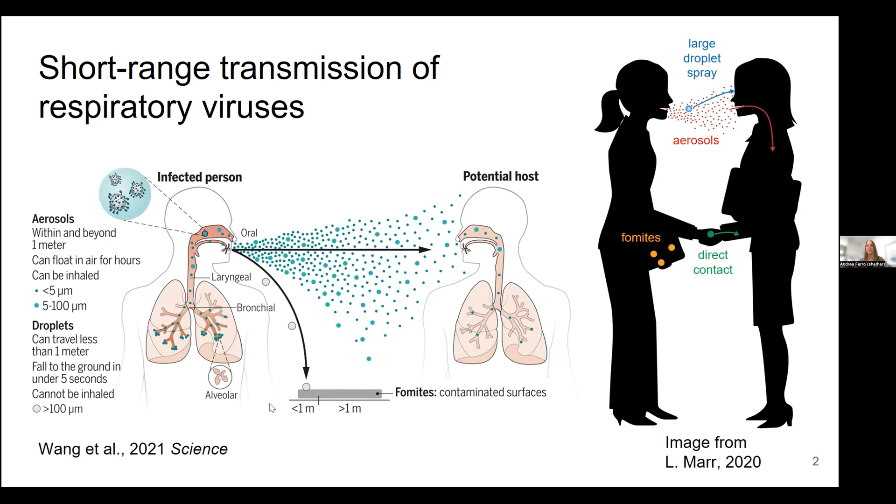Actually, in my lab, we've done quite a bit of work on the emission of the aerosol. So we found that not only is loudness a major factor for the emission rate of the particles that are emitted during these different vocalization exercises, but also frequency. And recently we published a paper to show that children's emissions are about 5 times lower than those for adults. We've also done quite a bit of work on what happens to the aerosol once it is emitted from a person and how it moves throughout the room.

And you've seen some of those images as well in discussions over the symposium over the last day. This shows that the aerosol is sort of well mixed throughout the room. That's often how we model the exposure of another person that's in the room. We often assume that once the aerosol gets out from the person's mouth, then it mixes throughout the

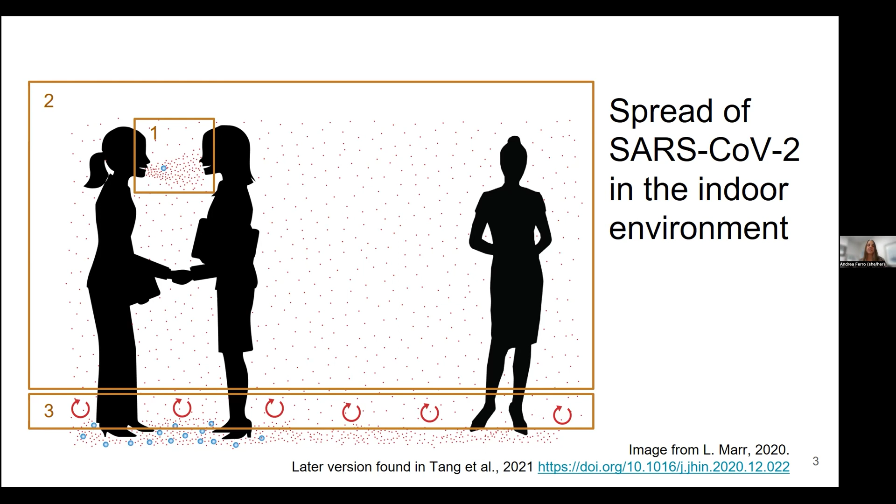room. And then today I'm going to be focused mostly on what happens after those particles deposit onto surfaces and get resuspended up into the air. So this shows the little arrows being fairly small. If a person is walking and moving, and resuspending those particles, they're also helping mix them throughout the room. So we know that the particles that are resuspended from surfaces can get throughout the room, and as Dr. Lee showed, end up in the ventilation system.

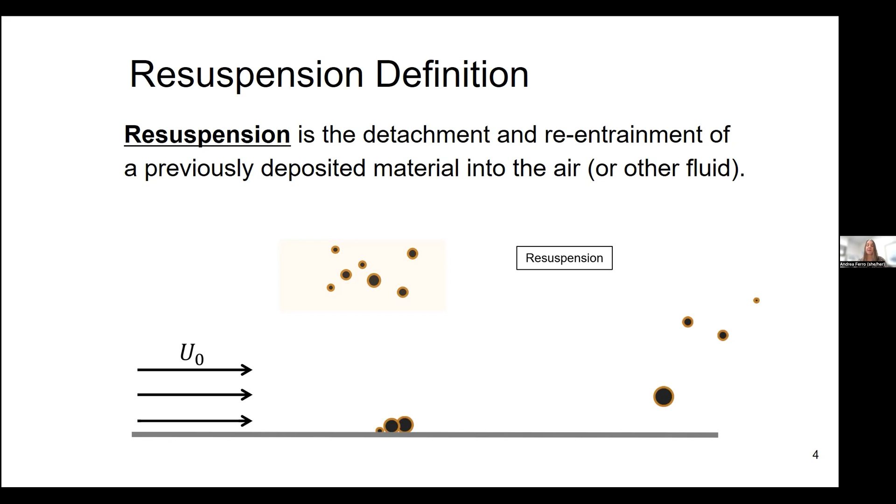So just a definition of resuspension: if we have particles that are in the air, they will deposit eventually on surfaces or be removed from the air with the ventilation. But there could be an external force applied to those particles that removes them. So the particles have adhesive forces that keep them on the surfaces, but an external force, even a foot stepping down, creates enough external force to detach those particles. The larger particles are easier to detach than the smaller ones, just because of the balance of forces. So that's something that we'll see today as well.

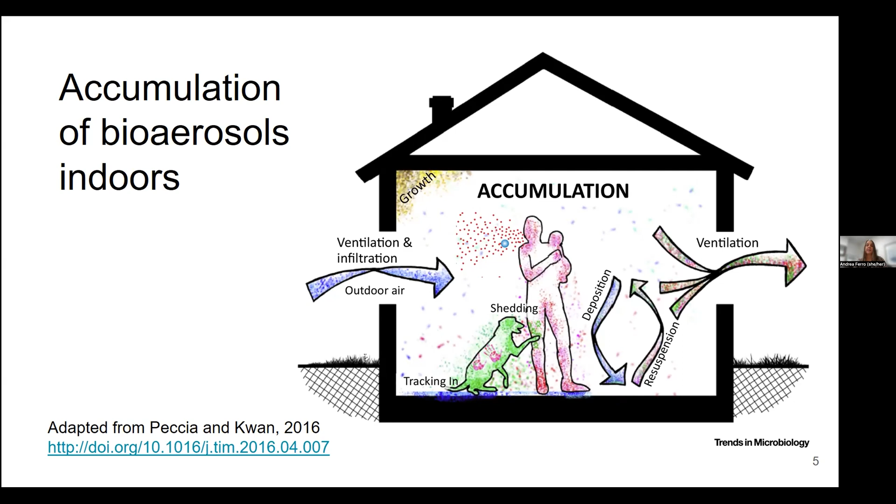Interestingly, the HVAC system can produce that external force. You have some airflow that's produced by ventilation systems, but it's typically not high enough to induce resuspension. This is just a summary of the ways that bioaerosols can accumulate indoors. So the things on the left add to the bioaerosols: natural and mechanical ventilation, infiltration through cracks in the building envelope, and then indoor emissions. So there are all these indoor sources: humans, pets, potentially plumbing, resuspension, and so on.

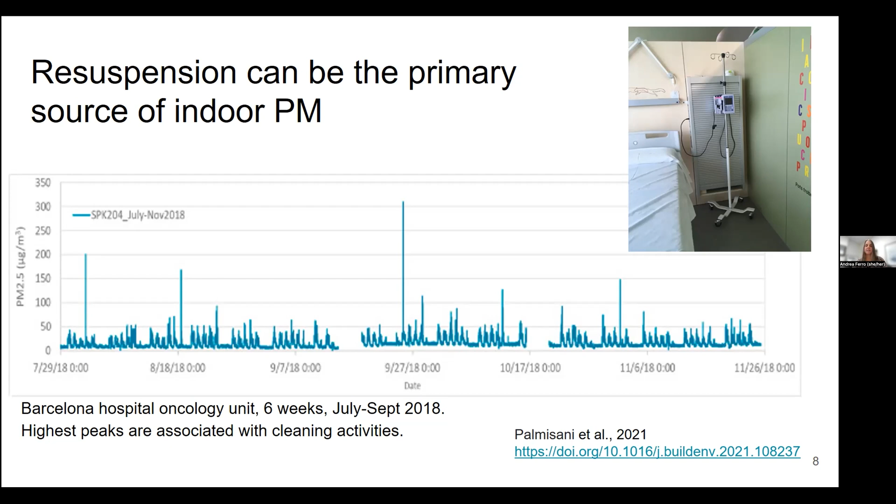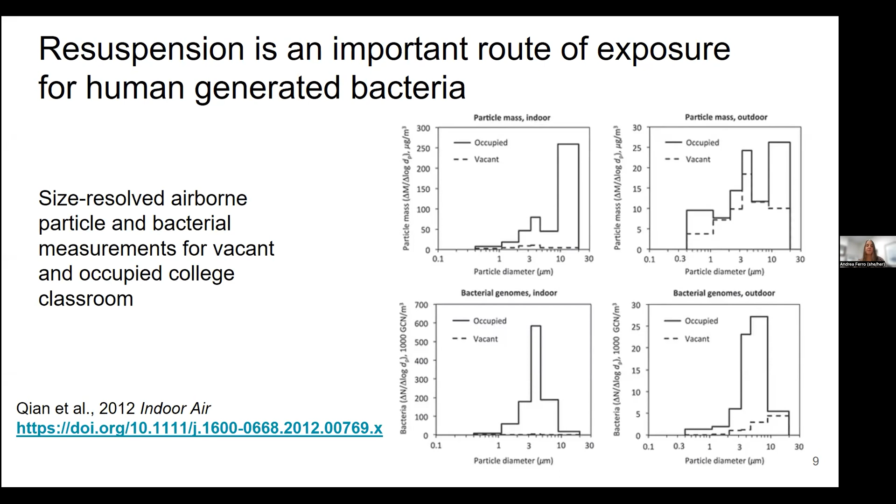But if you look at the bacterial genome, that's also the case. Without people in the room, you have this very low concentration, and when it's occupied, much higher. You can see that the peak here is a little higher, like 3 to 5 micron size. And outdoors, there was actually a little bit more during the occupied time as well. We're really focused on this indoor space, and we know that there were no other sources, that resuspension was the main source of that increase in concentration.

I myself have performed many studies on resuspension, and others have as well. These studies have occurred in homes, schools, hospitals, other types of buildings, but also in laboratories so that we can control the different factors. A major factor is just the way people walk, because of the forces, and the kinds of shoes that they're wearing. Different factors have been tested in various studies: the type of particle, the flooring type, the floor dust loading, the relative humidity, which is also related to the electrostatic charge, shoe type, and individual walking style.

For this symposium, I highlighted these because I think these are things that we can think about in terms of interior design, right? Certainly the flooring type, but also the floor dust loading has to do with how you can clean the flooring and other surfaces. And then the others have to do with how you operate the building.

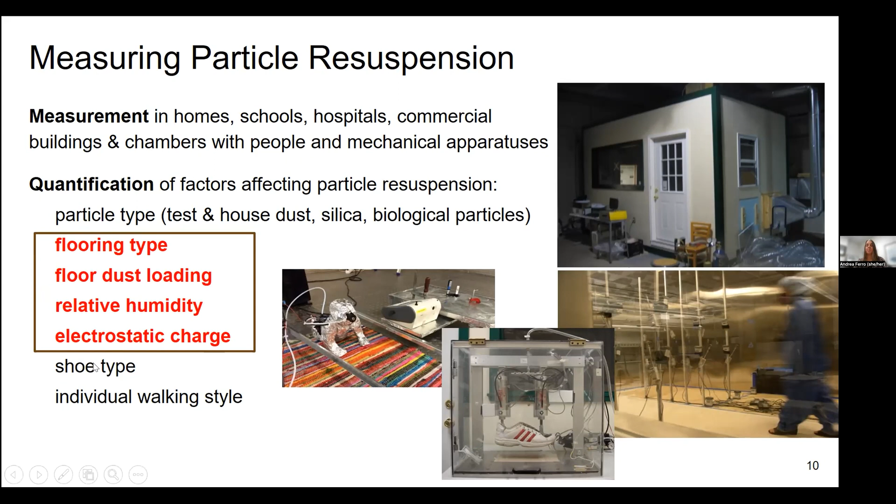I think Shelley Miller talked yesterday about the different sizes of particles. 10 microns and below are what are called inhalable, so they can get into the respiratory system. Different size particles dictate where they end up in your respiratory system when you breathe them. Size is also very important for resuspension, with the larger particles in the size range being easier to resuspend. These data are taken from a mechanical foot that I borrowed from the Lawrence Berkeley National Lab, so we were able to control the other factors and look just at, in this case, flooring.

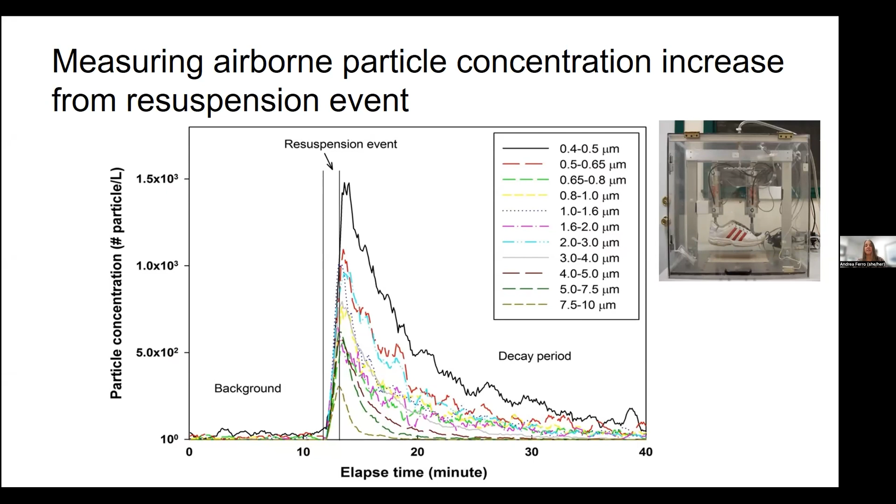Kim Prather was talking about this yesterday, right? The person who's emitting the virus into the air can leave the room, but the concentration in the room is still elevated.

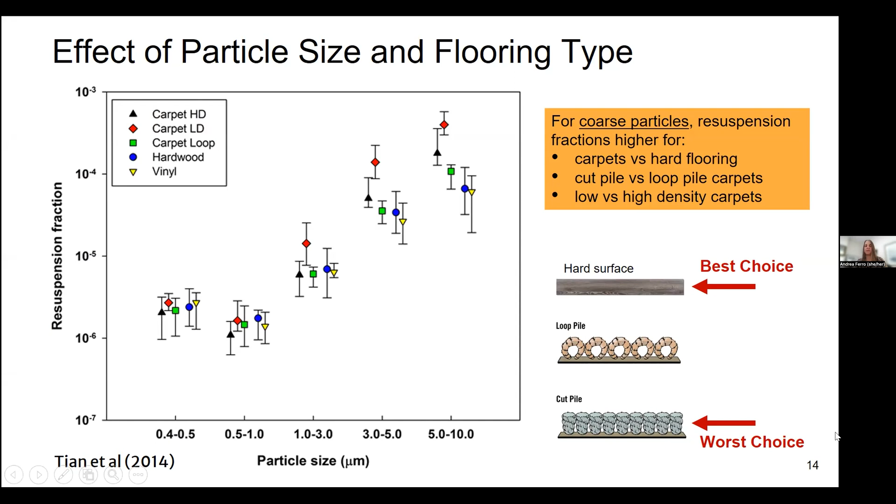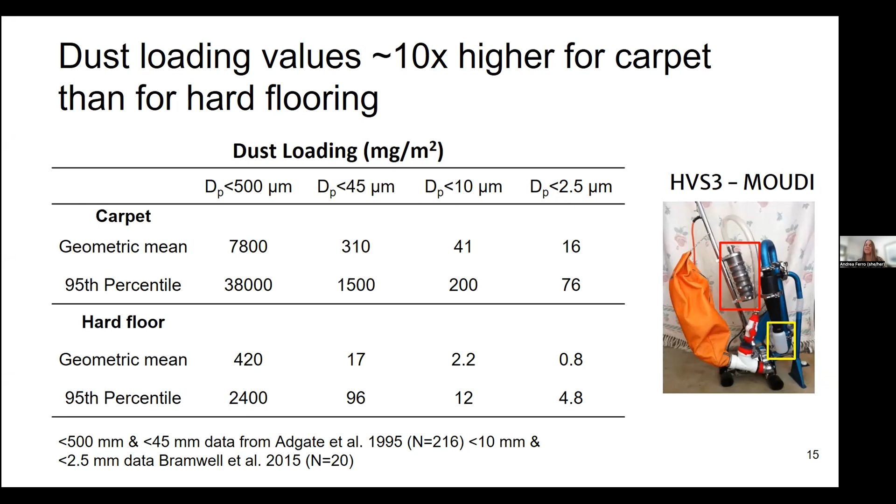So you can see that if you compare carpet with hard floor, the dust loadings are about 10 times higher for carpet. So now you have resuspension fractions that are higher for carpet, as well as the dust loading tends to build up on carpets. So this could be resolved with cleaning, but these are data from the field.

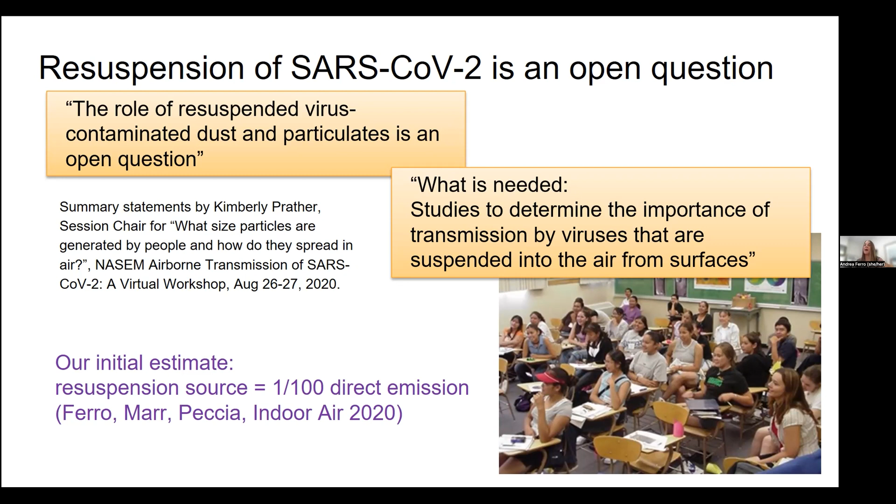And so looking at the size of the particles that are carrying the virus, the respiratory particles, can we estimate what would be this source? And we estimated with many assumptions that the resuspension source is about 1/100th that of direct emission. That is, if a person is emitting the virus in the room for some period of time, and then another person comes in, or that person walks in that room, what would be the emission? And so the calculation that we did, it was about 1/100. Again, there are lots of assumptions in here, and it would matter what the ventilation rate is, the size of the room, all those things.

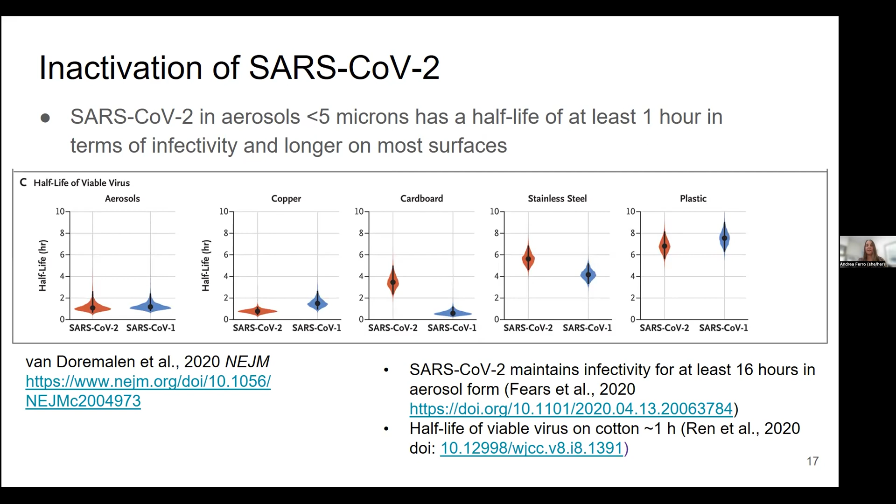Should we worry about resuspension for viruses? Of course, it depends on the infectivity of that virus. These are some estimates on the inactivation of SARS-CoV-2, and we can see that the half-life is at least an hour in aerosols, and also a lot longer on surfaces, up to days. So we do know that we have viable virus on these surfaces.

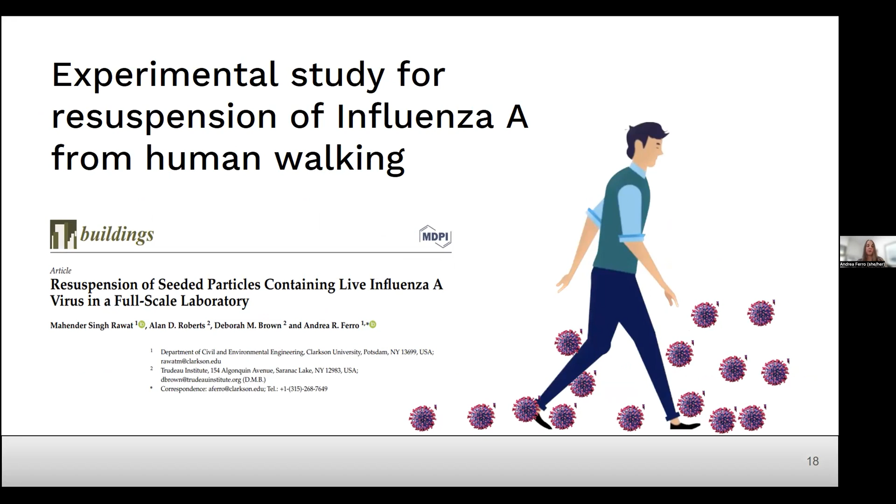We conducted a full-scale experimental study using influenza A as our virus. This is the first full-scale experimental study on virus resuspension, at least to my knowledge, that was just published a few months ago. We did our experiments in a biosafety level 2 laboratory at Trudeau Institute in Saranac Lake. It's an infectious disease institute.

We emitted the influenza virus in a suspension out into the laboratory, and then waited for several hours for it to deposit. And then we had a person come in and walk within the laboratory to resuspend that. We were collecting samples on the surfaces, so there were open plates where we were collecting samples and analyzing those.

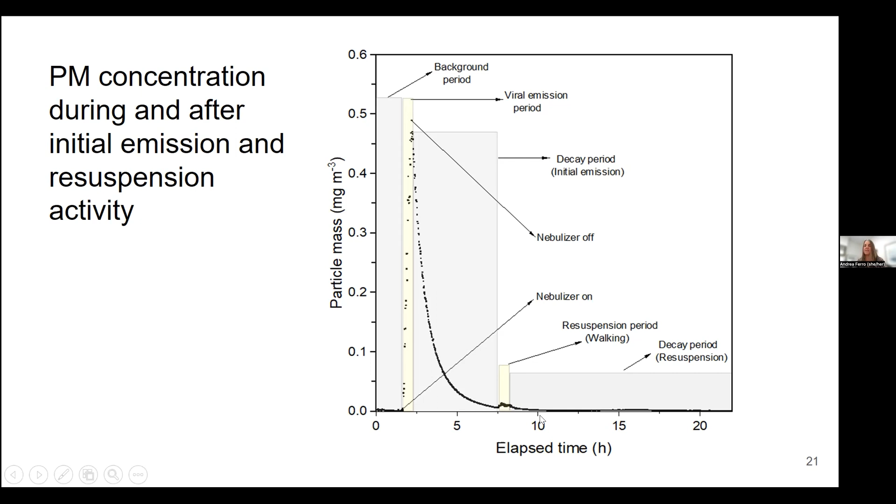Then there's a resuspension event, the walking. You can see the particle concentration goes up again and then decreases. That is the time series for the particulate matter. But if you look at the virus concentration collected in impingers, during the initial emission most of the virus was closer to the nebulizer. These locations are close to the nebulizer, and these are further toward the end of the room, so there were higher concentrations near the source, which is expected.

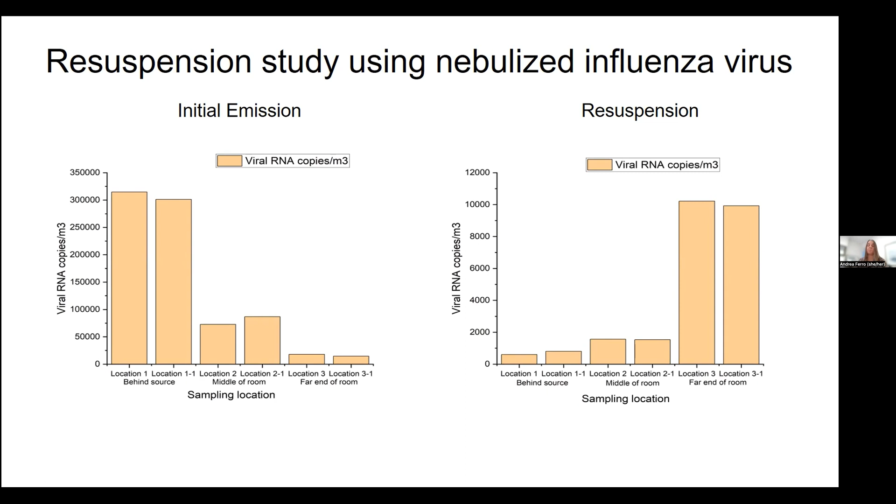But during the resuspension, the opposite was true. Most of the virus that was resuspended was toward the other end of the room. That is because where the nebulizer was, there was a cart and other things in the way. So most of the resuspension activity took place on the far end of the room. So that also makes sense.

As a summary for this study, this is the initial emission for clean surfaces. We cleaned all the surfaces first, and then the resuspension source. This is the viral copies in the air per volume of air, and we can see it's about 100 times less during the resuspension event than the initial emission. We had fairly low air changes, below one air change per hour in this room, so much of the virus that was emitted ended up on surfaces, and that was the source.

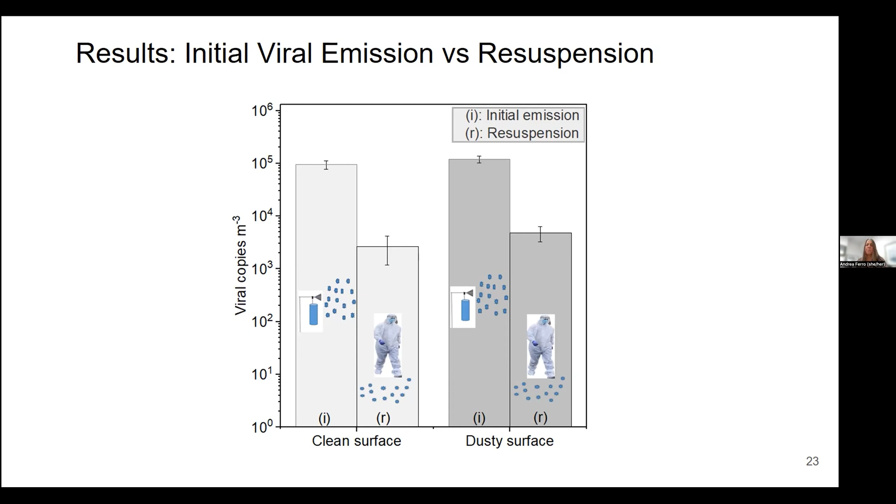We actually looked at dusty surfaces because, as I mentioned, the size of the particle makes a big difference for resuspension. We were thinking that if most surfaces in real environments have dust on them, the dust could act as a carrier for the virus. If the viral liquid particle falls on a dust particle, it might be easier to resuspend. We did see a slight elevation in the resuspension with the dusty surface, very, very small, but there was some.

I also wanted to mention clothing, right? So we talked about clothing and also other surfaces. So this is a study that was just published by Dusan Licina and Brandon Boor on comparing particles released from clothing and skin. And that here is shown by someone seated and doing seated activities compared to walking, compared to vacuuming and cooking. And so this is the mass concentration by particle size in the breathing zone of the person. And then you can see the different sizes here. So this is similar to the other plots I showed you.

So you can see that compared to vacuuming and cooking, the walking and seated activities were lower concentrations, and much of that concentration was in the larger sizes, which one would expect. The walking had higher concentrations than the seated activities. Other studies have shown that walking actually, and Dusan Licina was involved in these studies too, if you look at all the particles that are emitted, has about 2 times more emissions than seated activities. That was for just another study in certain conditions.

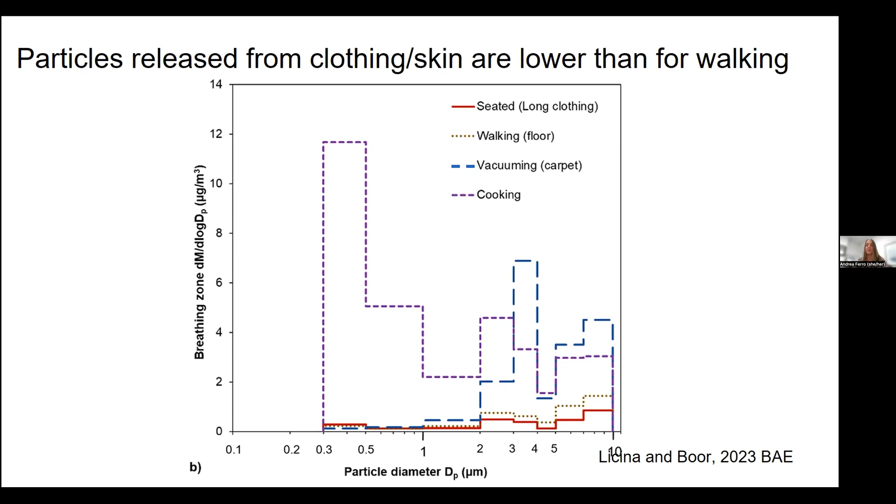So we do see higher emissions from walking compared to release from clothing and skin, but the clothing and skin is still substantial. But here's the difference. The intake fraction is higher for the seated activities. So this is a person, this is in their breathing zone, and the emissions are from their clothing and skin, which is closer to their breathing zone than the floor. And also they're seated, so they're not walking away from the source, which you do when you're walking. So the inhalation intake fraction is higher for the seated activities. So I think that this shows that resuspension or shedding from clothing or skin is also important.

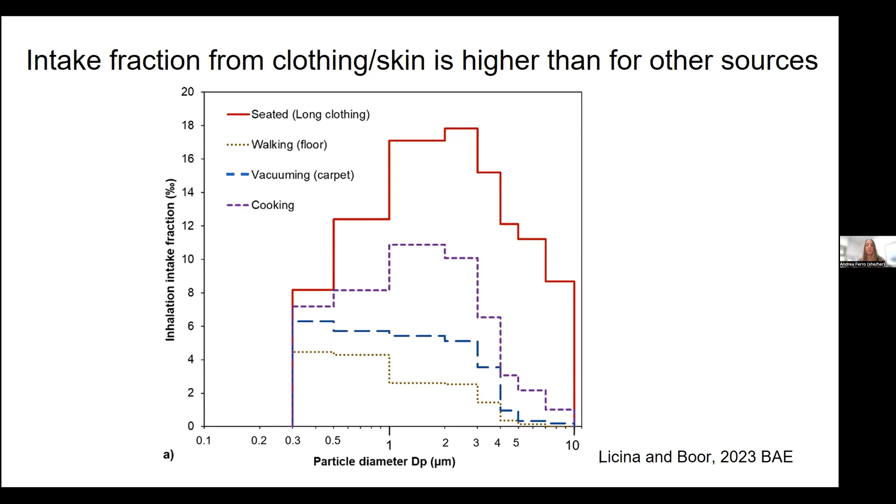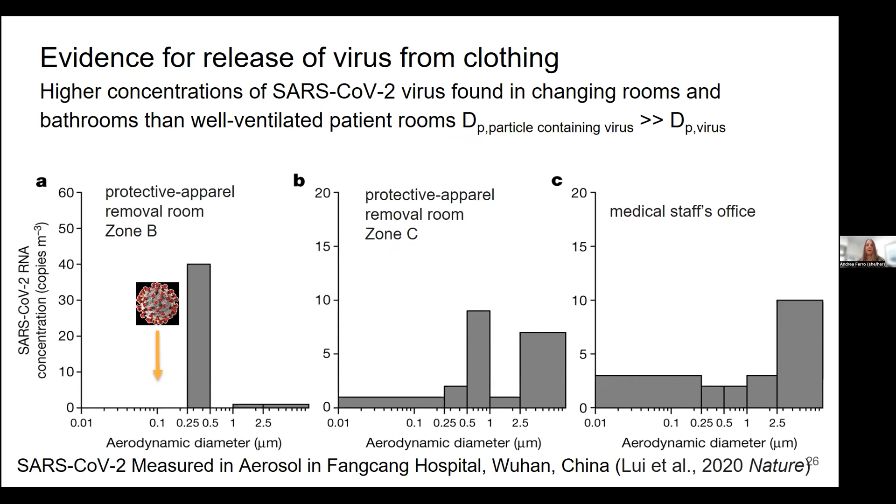There's some evidence of this from the field. This is early data from the Fangcang Hospital in Wuhan, and showed that the SARS-CoV-2 RNA concentrations were fairly high in the protective apparel removal room, even though there were no patients there. It's shown here too. So that's more support. So let me summarize here. Hopefully I haven't taken too long.

The viruses can resuspend after settling on surfaces. This was predicted by models and also by full-scale measurements. Particle resuspension could be an important exposure pathway. So I showed you this round number of the emission from resuspension being about 1/100th of that of the direct emission. But you can imagine scenarios, say you had 100 people in a room, a classroom, that's 100 times the emission. So you could have different scenarios. Say your ventilation rate was higher or lower, that would change that equation.

I think that the takeaway here is that it's important to have surfaces that can be cleaned, so we can reduce that reservoir of pathogens on surfaces. Also, we do need to look at particle release from clothing, which could be more important for exposure. And also, to go back to these other engineering controls that we've discussed, ventilation, filtration, disinfection would certainly reduce the exposure by reducing the concentrations of the particles that are resuspended.

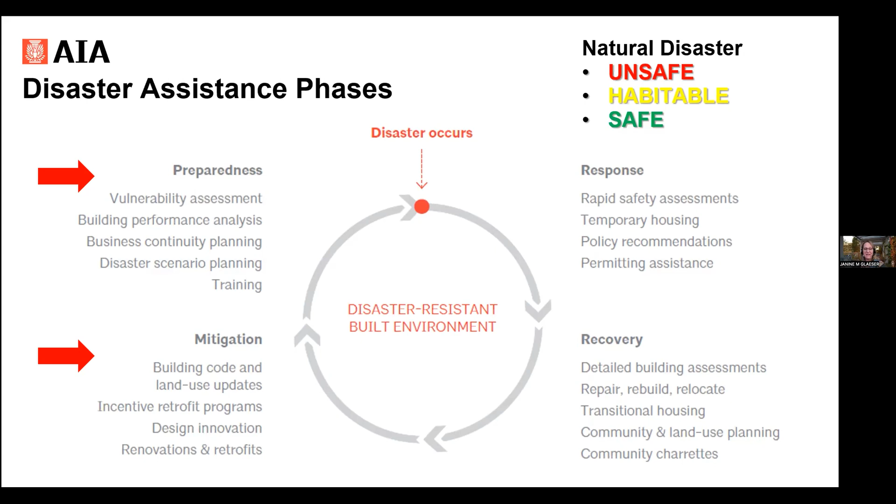So this AIA multidisciplinary team conducted a virtual charrette workshop. We love charrettes. And this was a method used to study specific issues in a limited time frame in an intense brainstorming session. And our goal was to develop strategies that reduce the risk of virus transmission in buildings. Using the AIA reoccupancy assessment tool framework, the team identified virus transmission hazards, characterized risk in buildings, and developed strategies, we'll call them controls, to minimize those risks.

Keeping in mind that there weren't just architects on these teams, there were many medical and public health experts that contributed to a lot of the decisions and the development of these tools. So successful strategies reduce the spread of pathogens, accommodate physical distancing guidance, promote mental well-being, and otherwise meet the demands of the pandemic-informed new day-to-day lifestyle norm. Strategies range from temporary to permanent.

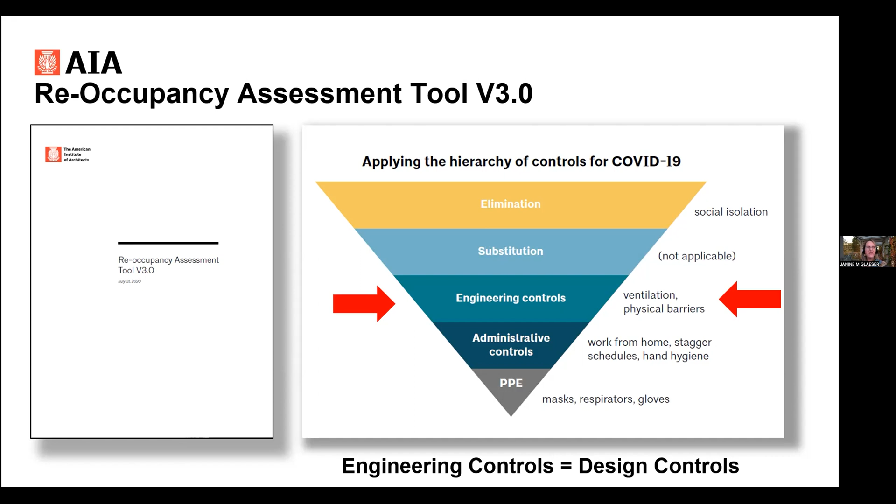So this 33-page assessment tool used the CDC, Centers for Disease Control, framework, hierarchy of controls. Andrea talked about this in her presentation, with the goal to select ways of controlling workplace hazards. The AIA reoccupancy assessment tool is a list of considerations that includes engineering controls, administrative controls, as well as PPE that apply to essential business operating under current restrictive orders and for closed non-essential facilities that are in the process of reopening. The intent of this assessment tool is to provide steps that reduce the risk of occupant exposure to SARS-CoV-2, the virus that causes COVID-19.

Events of the pandemic transformed the way we work, the way we learn, and the way we live. I mentioned that there are multiple documents and white papers that were developed by the AIA COVID-19 task force. But the one most relevant for use today and for the future is this reoccupancy assessment tool, version 3.0. Now, it's helpful to use some of the partner documents with it that were very specific to individual building types, including schools, offices, and senior living communities.

So before you start the checklist, let's take a look at what the baseline parameters are. Number one, identify the team. It's ideal if there are multidisciplinary team members, including an architect, quite possibly an engineer. Absolutely must include the building owner, the facility manager, and quite possibly an occupant of the space, because we're all going to be looking at it from different perspectives. Additionally, the team must be committed to the same goal of reopening safely.

The team must have the authority to make these decisions. That's pretty critical, because without that buy-in, you're not going to get very far. You must have permission to conduct this assessment. So if the intended operation of the facility cannot meet these baseline parameters, the facility is likely not a good candidate for following reopening considerations for minimizing the risk of spreading SARS-CoV-2. Also, the facility may have additional prerequisites considering what type of facility it is.

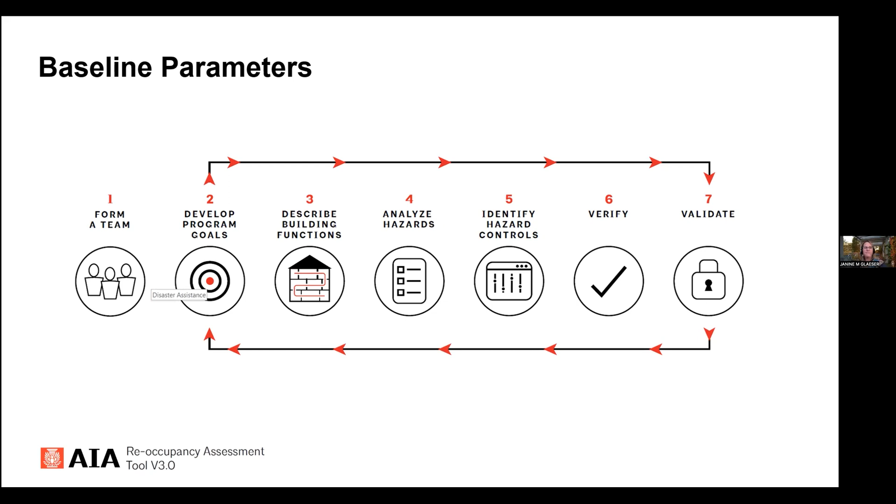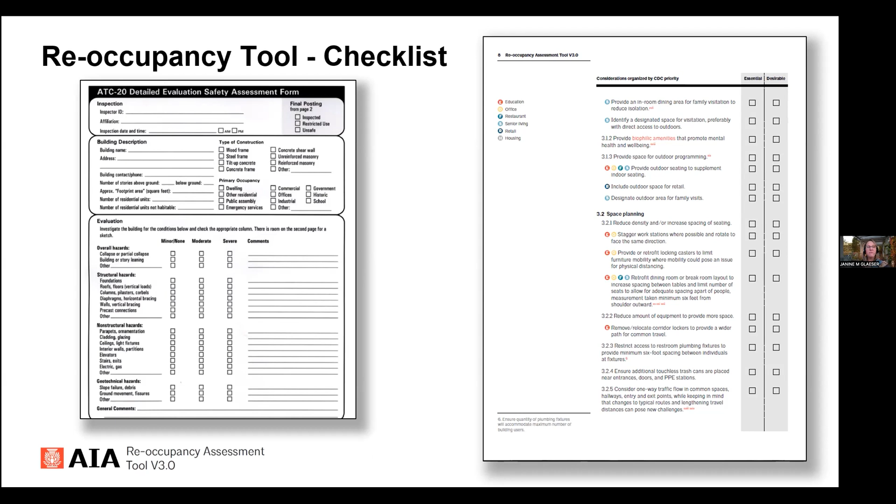What happens when you can't see the danger with your eyes? Well, a lot of the scientists that I've been speaking with yesterday and today have been talking about just that. So the checklist that was created on the right is a form to determine which buildings were safe to go back into, much like the other one. How can we go back into a building and make sure it's safe? This is page 8 from the Reoccupancy Assessment Tool, version 3.0. It's laid out with some symbols, some check boxes, and it's all organized to guide the person filling out the form to determine which would work best for their building or space type.

So not all controls may be applicable to all building types under all situations. Similarly, I mentioned additional controls may be necessary. So the image on the left shows a list of the different building types that were considered: education, office, restaurant, senior living, retail, and housing. And you see a symbol with a letter in it. Each symbol has a different color. And on the image on the right, you can see some of these symbols peppered across the form. And that's to give you a hint that that particular control or approach might be better suited for that building type. And additionally, your ultimate goal is to prioritize these. Which ones are essential and which ones are desirable?

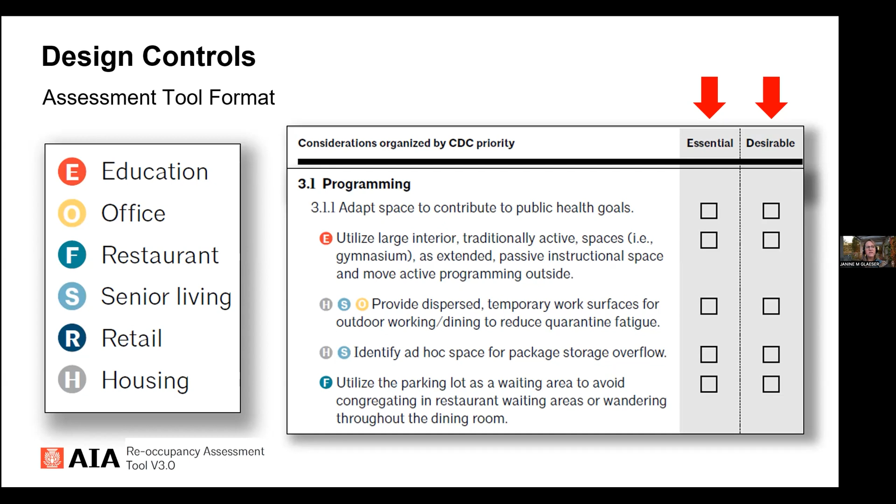The assessment tool does not prescribe required solutions, but applies controls to many building types and scales of operation. Building owners are encouraged to communicate their mitigation measures to the occupants to foster transparency that could help the public make informed decisions about their own health and safety, and maybe the health and safety of others. The architectural and engineering features include spatial, finishes, furniture, partitions, additions, facilities, mechanical, systems, plumbing, and electrical.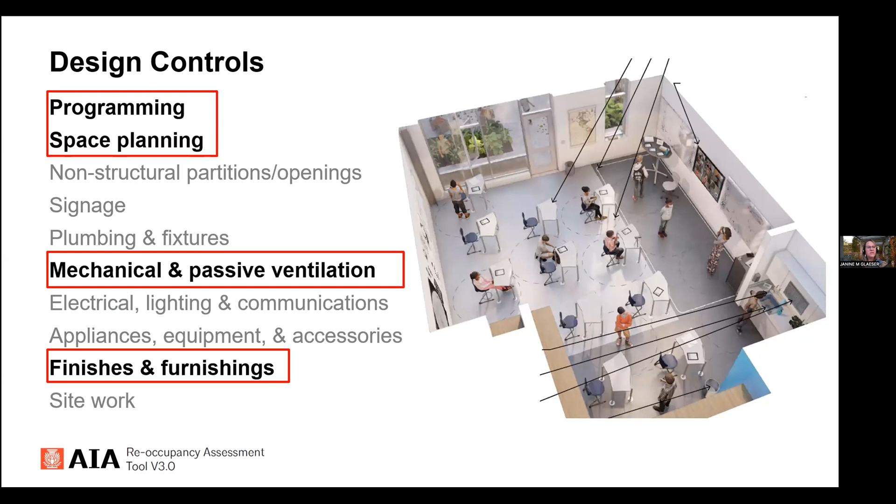For today's discussion, I'll focus on 3 of these areas that might be a little bit more relevant to interior designers and other types of designers. These 3 areas include programming and space planning, mechanical and passive ventilation, we know that that's a critical approach, and finishes and furnishings. So starting out with programming and space planning. Again, consider which design controls are essential and which are desirable. Think about this particular image. This shows what was once a double classroom space turned into a single classroom.

Again, early on in the pandemic, we used the information that we had to make some decisions. Utilize this large interior space as an extended instructional space. Additionally, in the upper left-hand corner, you can see outdoor spaces. Provide outdoor spaces for learning and working. And then utilize a parking lot for waiting areas. There's a lot of opportunity to think differently about how we use space.

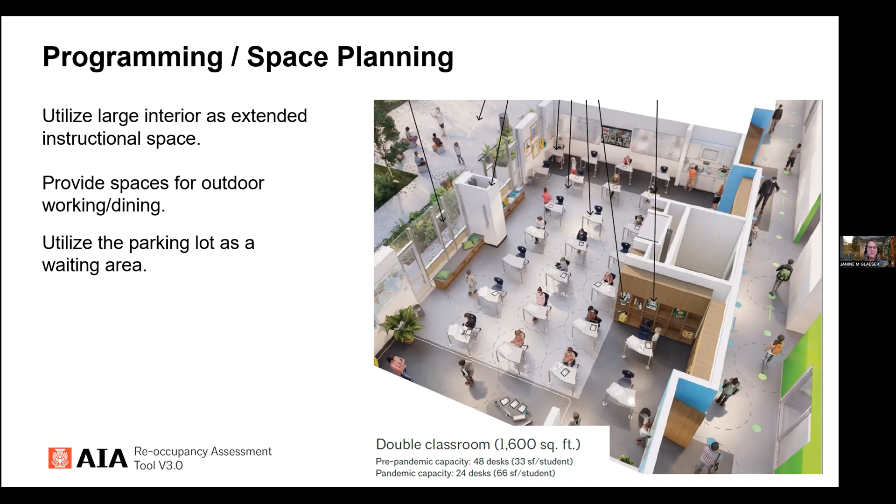Taking a closer look at programming and space planning for a classroom environment, here are a few reoccupancy tool controls that set the standards for returning to schools early in the pandemic. We talked about staggering the placement of furniture, perhaps mapping the floor to identify where the instructor is and where the students are, and provide a locking mechanism on chairs and tables to hold them in place, but also make them flexible to move around, and also provide virtual learning. Which of these tools and controls, if any, do we want to use to reimagine and design schools and offices of the future? I have some examples.

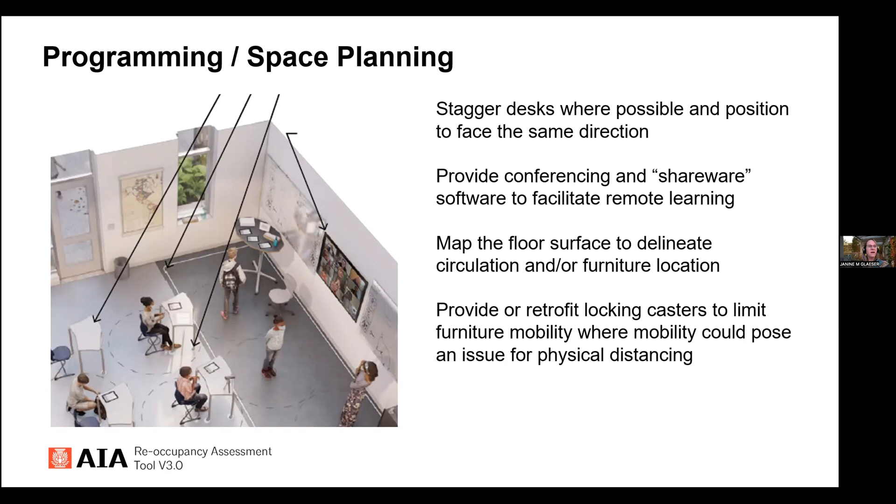Biophilic design is a design approach that seeks to connect building occupants more closely with nature. Biophilic design buildings incorporate things like natural lighting, ventilation, natural landscape features, and other elements for creating a more productive and healthy built environment for people. Use nature as your guide. We know now more than ever how important it is to prioritize mental health and wellness in interior spaces.

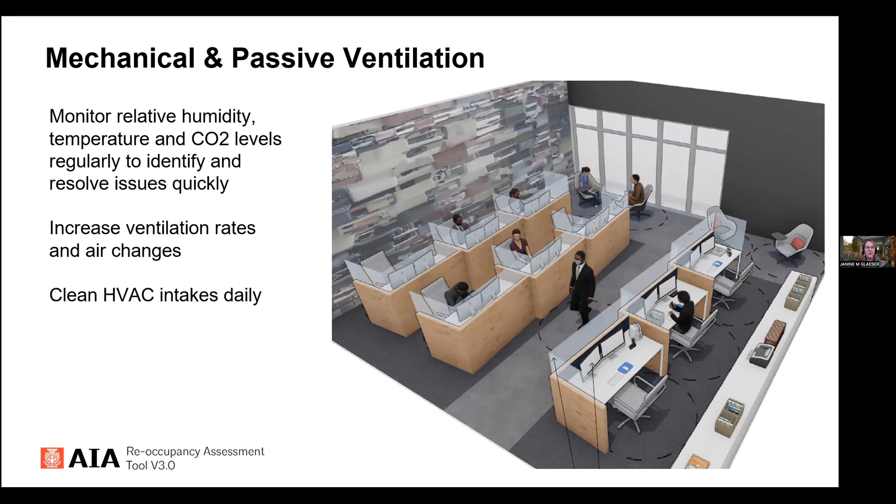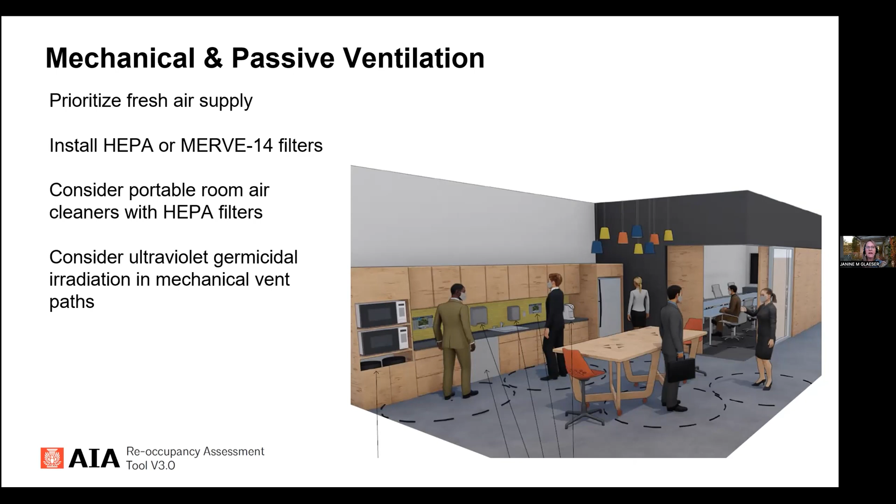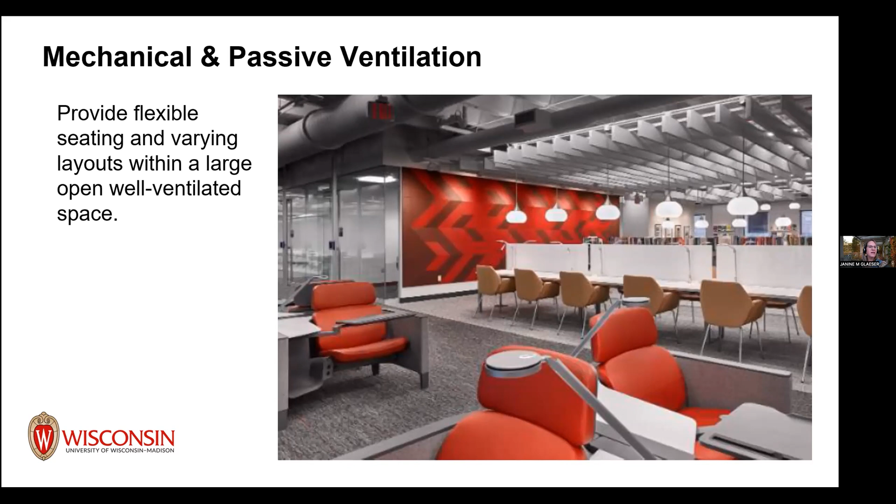So here's an open office example showing a shared workspace, a shared break room. One option is, again, prioritize fresh air supply. Perhaps install a retrofit and install a HEPA or MERV 14 filter. And consider portable room air cleaners. And also consider installing ultraviolet germicidal irradiation in mechanical vent paths. Here's an example of a student study space that we're looking to optimize flexibility and create multiple seating types and varying layouts within an open, well-ventilated space.

Here's another example of a shared eating facility. And again, I'm transitioning from mechanical and ventilation to finishes and furnishing. Looking at how this shared eating space could be used and thought about differently. We talked a lot about ventilation, but what about the layout? What about the fixtures and finishes within the space? Number one, start by removing non-essential furniture and equipment, maximize flexibility.

Think about the furniture. Provide wheels on the chairs, wheels on the tables. You can easily move and adapt them based on perhaps the flu season or the use of the space. And then perhaps provide a flip-up table so they can easily be stored in another area and then brought out and set up. Also, provide touchless hand washing stations and touchless trash cans. And I know that interior designers are going to be specifying this equipment.

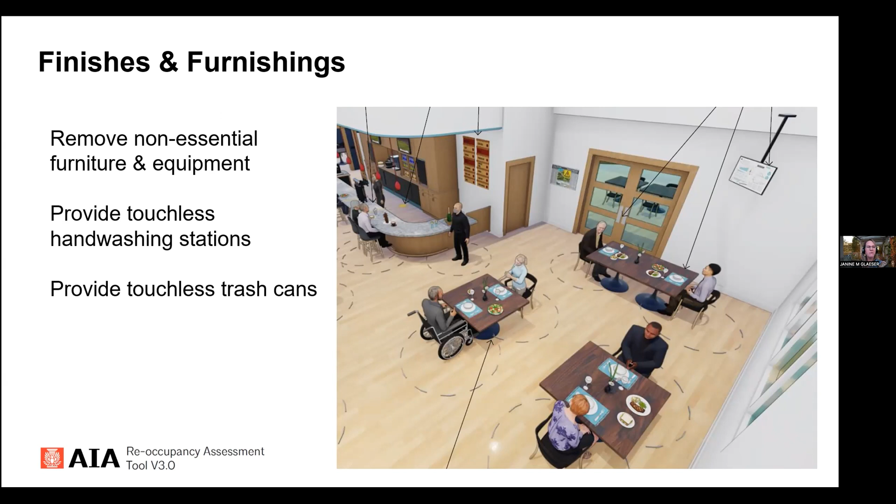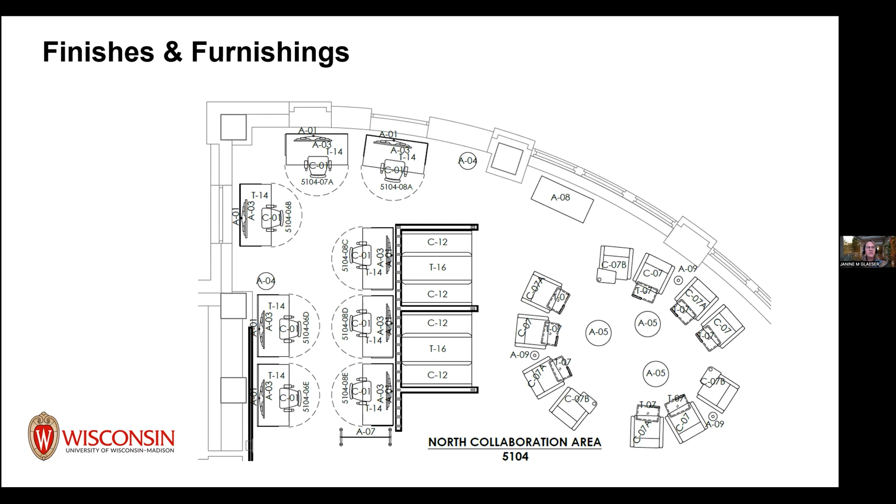And this is what that workstation would look like. This is the model we're starting to incorporate more and more throughout different offices on campus, something that provides privacy, but also could be moved around if we needed to think about different hazards.

So we think about the future of design. How can we use this information to create healthier buildings and spaces? We still have a lot to learn, and we can still do better, but we can take what we learned from this symposium and maybe start with bathrooms. We've talked a lot about bathrooms and the opportunities. Continue specifying touchless fixtures. Continue thinking about airflow, perhaps creating a layout without doors to maximize air circulation.

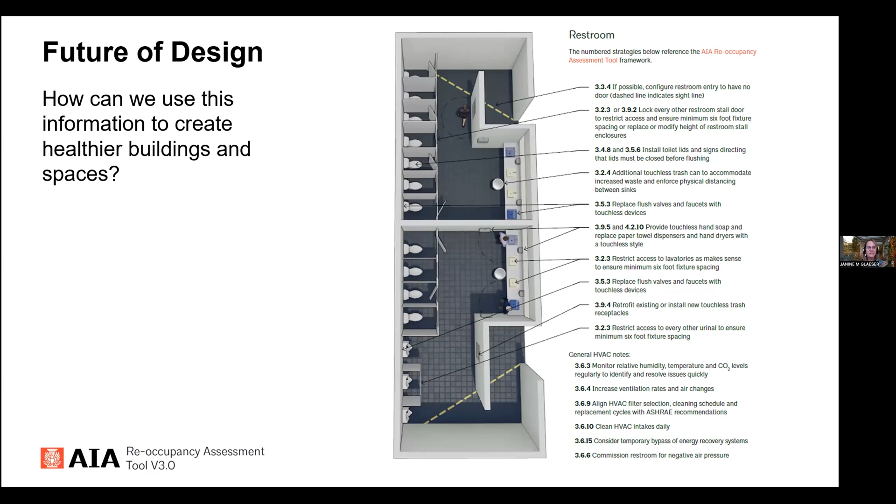And I'm sorry, but I'm going to bring it up. Let's talk about those toilet lids. It's something that you can easily specify to help minimize some of that hazard in the space.

I'm going to end by saying that the American Institute of Architects would like to recognize the expertise, time, and significant effort of the AIA 2020 Disaster Assistance Committee and the AIA COVID-19 charrette participants in cultivating this tool. It took many experts to bring this together. So myself as the vice chair, Scott Eddy as the chair, AIA staff, Lindsay Bruger and Rachel Minery, who were critical in keeping us on task, and of course our peer reviewers, a lot of which had medical and public health backgrounds. And then we had the project team.

And I wanted to say that we did ultimately dedicate this tool to a member of our team who we did unfortunately lose to COVID-19 last year, Mo. He's from California and a longtime advocate for disaster assistance and how architects can help communities become more resilient. So we dedicate this to him.

So with that, I'd like to hand it back to Pooja for questions. And I'd like to thank you again for inviting me to participate in this symposium. And I'll see if I can figure out how to stop sharing.

That was fantastic, Ms. Glaeser. Thank you so much for sharing all of your incredible life work in disaster assistance with us. And it's incredibly interesting how the principles and approach to disaster assistance have been translated to the development of this re-occupancy assessment tool. It especially speaks to how the learnings from these related disciplines or problem types can translate to the ones, which is kind of the theme of our symposium. And all of the visual examples were also really helpful to us designers, I'm sure, to see how the tool can be translated to design solutions.